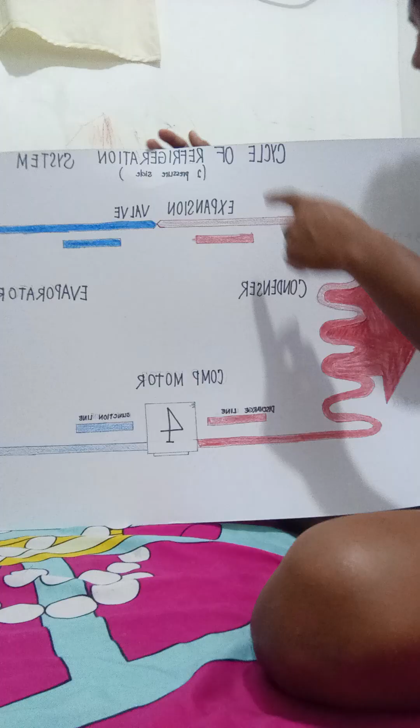Good day. Now I will discuss the cycle of refrigeration system. This refrigeration system has two pressure sides. Now we have four major components of the refrigeration system: comp motor or compressor, condenser, expansion valve, and evaporator.

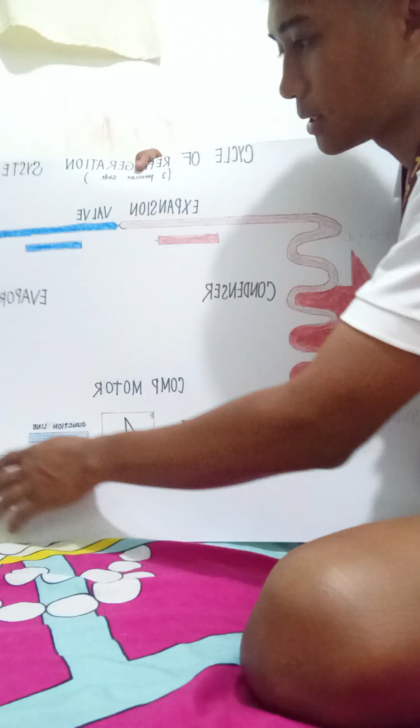First, the compressor. The cycle starts at the compressor. The compressor's job is to take low pressure refrigerant gas from the evaporator and compress it into high pressure. After the compressor, high temperature gas is compressed. This step is important because it gives the refrigerant the energy it needs to move heat out of the system, removing the heat out of the system.

After the compressor, we have the condenser. The refrigerant flows into the condenser, which is usually located at the back of the refrigerator or outside unit of the air conditioner. Here, the high pressure gas releases the heat it absorbed inside. As it passes the condenser, it loses heat to the surroundings. The refrigerant changes from hot gas into high pressure liquid.

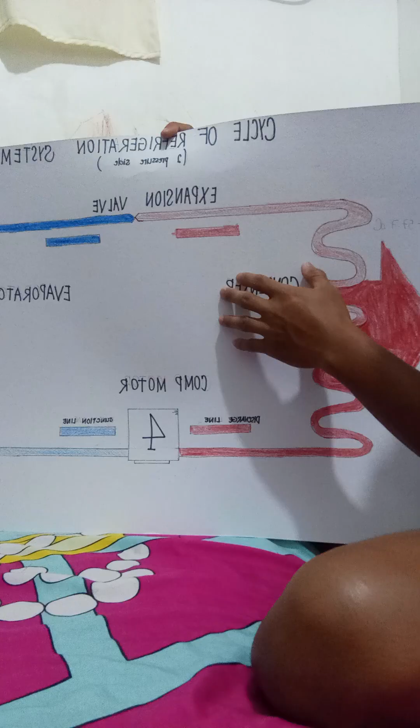After the condenser, we have the expansion valve or capillary tube. The refrigerant passes through it, and this component reduces the pressure. The condenser had high temperature gas, but the expansion valve reduces the temperature. As the pressure drops, the temperature also drops. This prepares the refrigerant to absorb heat once it enters the evaporator.

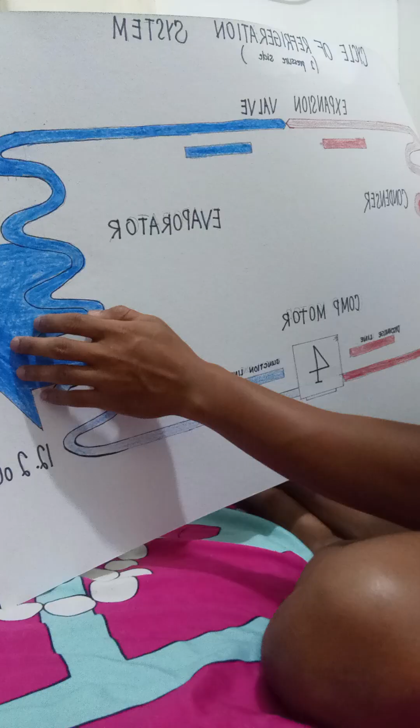After the expansion valve, we have the evaporator. Finally, the refrigerant enters the evaporator. This is the part inside the fridge or aircon where cooling happens.

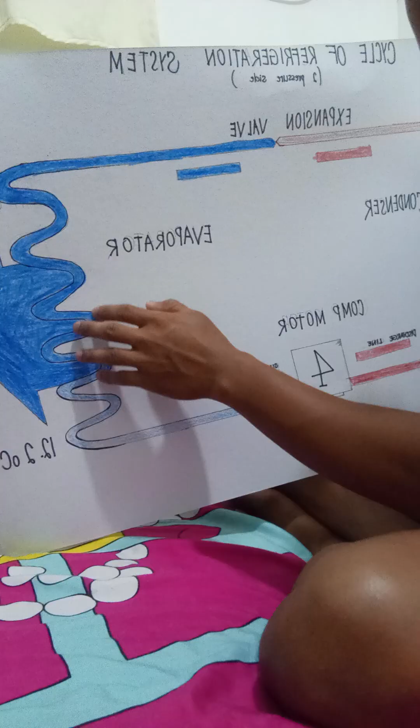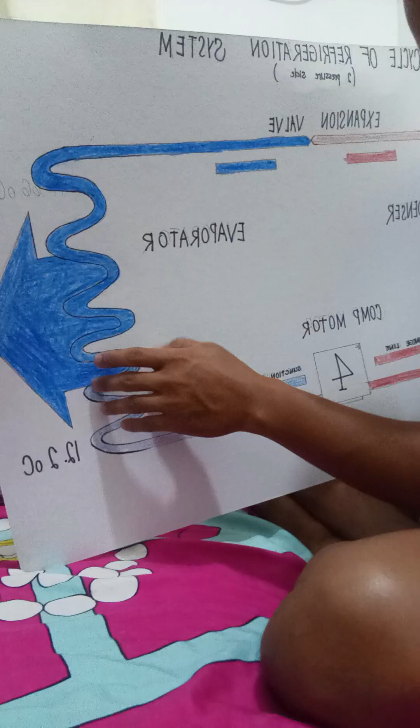The heat from the air inside the space, whether a room or car, is absorbed by the evaporator. It evaporates, turning back into a gas. The gas then returns to the compressor and the cycle repeats. The heat in your room or car is absorbed by the evaporator, and the cool air is returned to your room using a fan.

Now, after discussing the cycle of the refrigeration system, let's move to the parts of every major component.

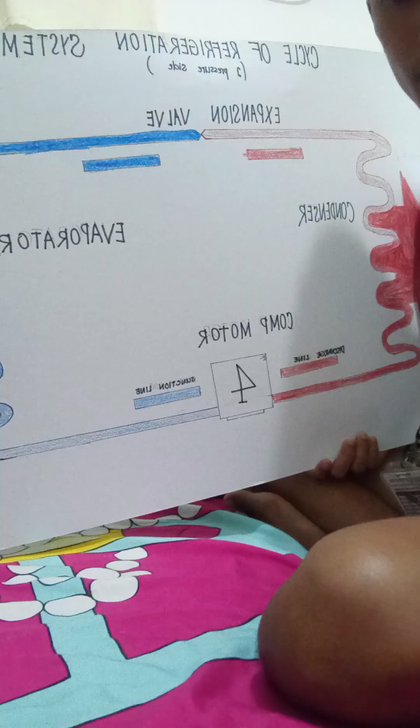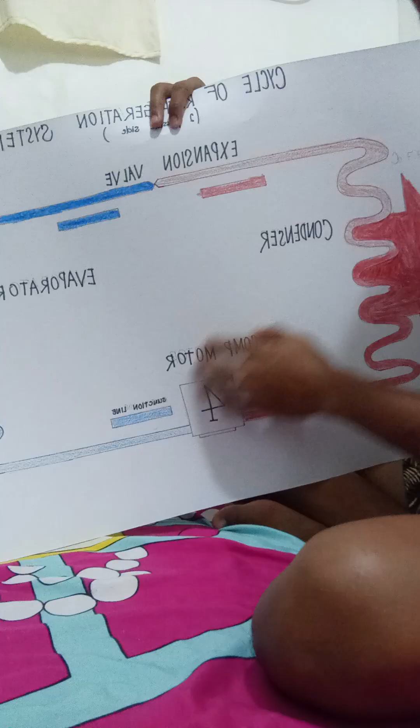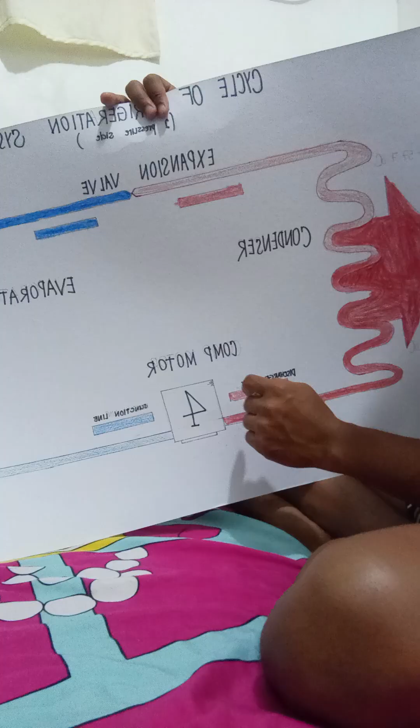Now the compressor has four parts. The first is the crankshaft, which drives the piston or scroll that compresses the gas, along with the cylinder and piston for a reciprocating compressor. The compressor also has valves, suction valve and discharge valve, which control the entry to the compressor. And the motor provides power to the compressor.

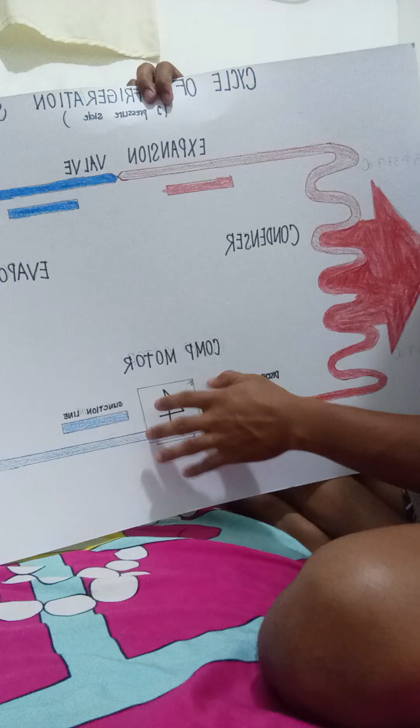Now let's move to how it works. The compressor draws in low pressure refrigerant vapor from the evaporator through the suction valve, compresses it inside the cylinder, then discharges it as high pressure, high temperature gas.

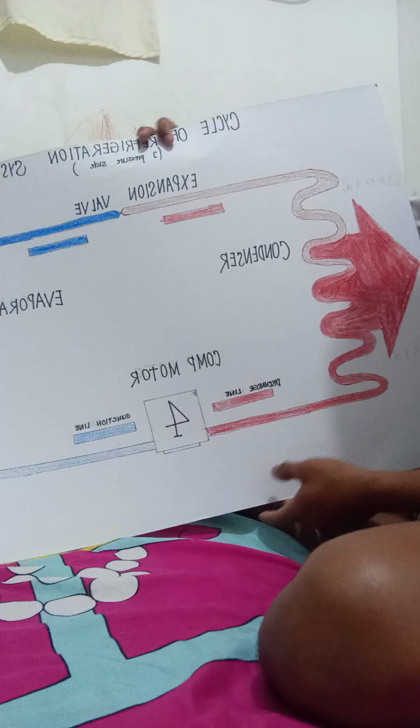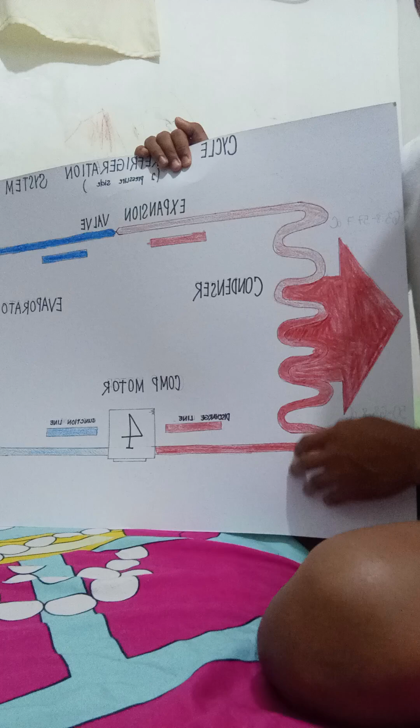Now let's move to the condenser. Condenser parts are first the coil, second the fins, fan, and receiver tank. The condenser coil is the tubing where the refrigerant passes. The fins increase the surface area. The receiver tank, sometimes combined, stores liquid refrigerant.

Now, how does the condenser work? The high pressure refrigerant flows into the condenser coil. The hot, high pressure refrigerant in the condenser coil, with the help of the fin and fan, releases heat to the outside air and condenses into a high pressure liquid.

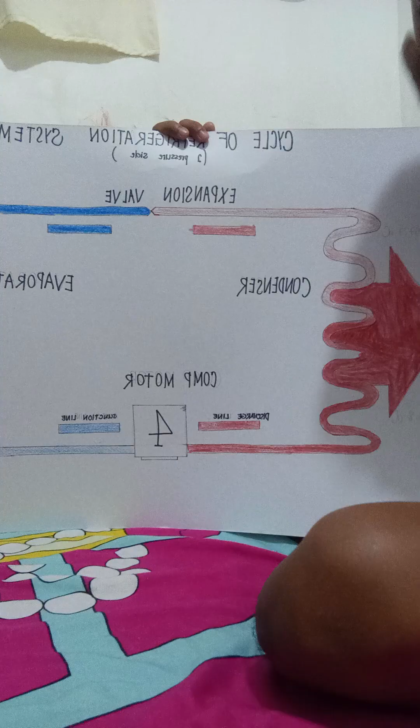After the condenser parts, let's move to the expansion valve, which has four parts: the valve body, the diaphragm, needle pin, and sensing bulb. The valve body houses the valve.

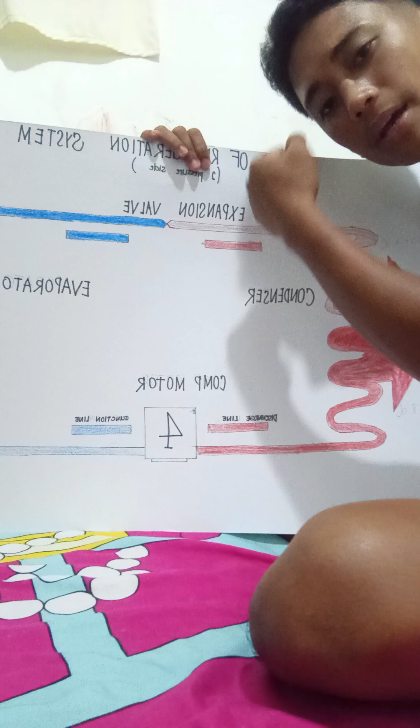The diaphragm moves up and down to regulate refrigerant flow through the expansion valve. The needle pin controls the size of the opening. The sensing bulb detects evaporator temperature to adjust the flow.

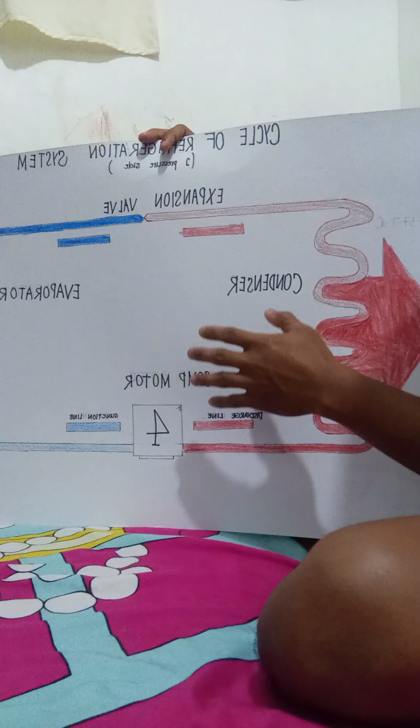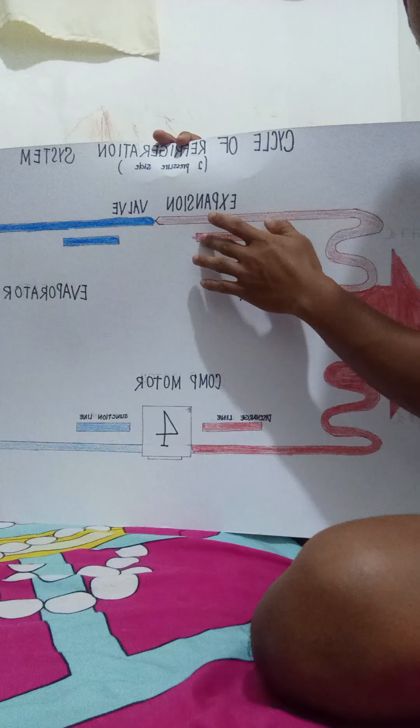Now, how it works: the expansion valve reduces the pressure of the refrigerant by controlling its flow. As the refrigerant passes through the small opening, its pressure drops suddenly, making it very cold before entering the evaporator.

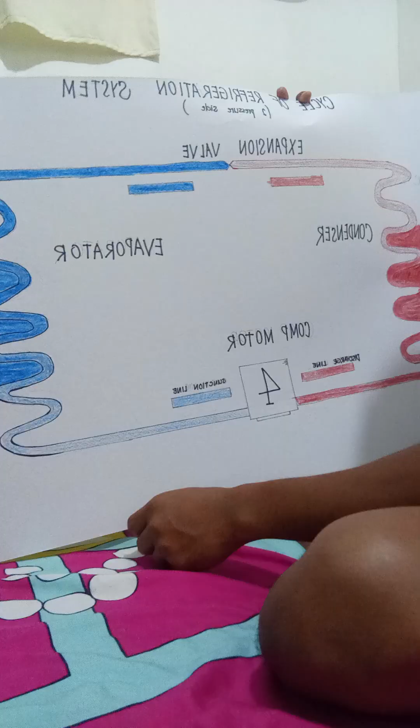Now let's move to the evaporator, the last component. It has four parts: the evaporator coil, fins, blower, and drain pan. Now the evaporator coil, how it works.

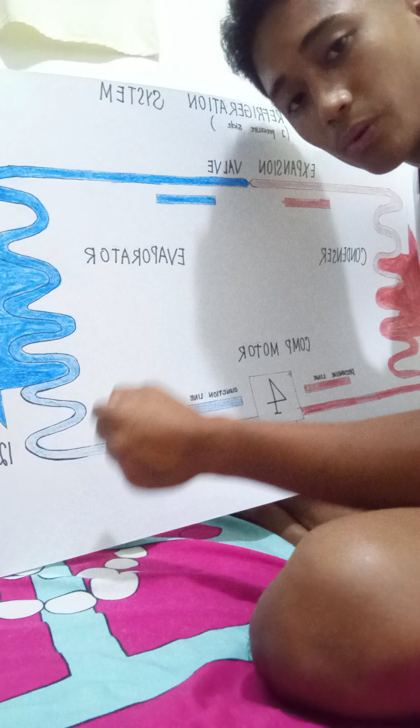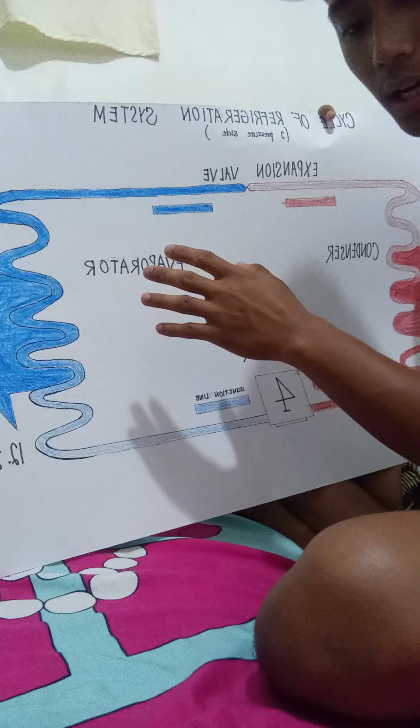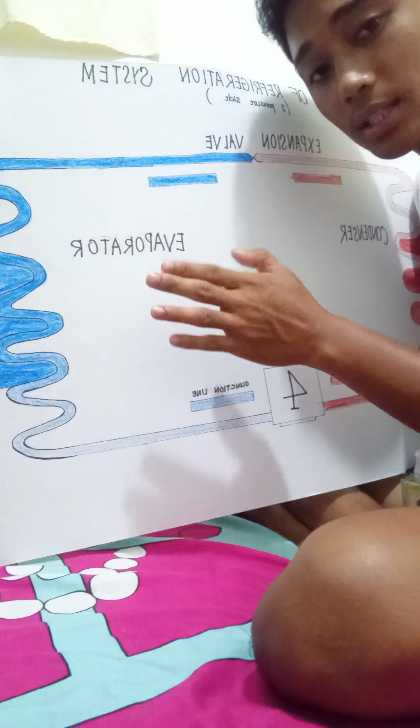The evaporator coil is where the refrigerant absorbs heat, and the fins work to help transfer heat from the air to the coil. The blower or fan: when the evaporator absorbs the heat in your room, the blower or fan releases the cold air back into your room.

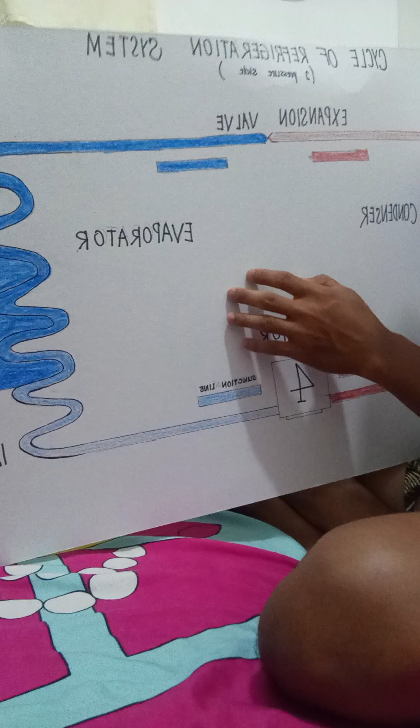Now the last part is the drain pan, which collects condensed water from the coil.

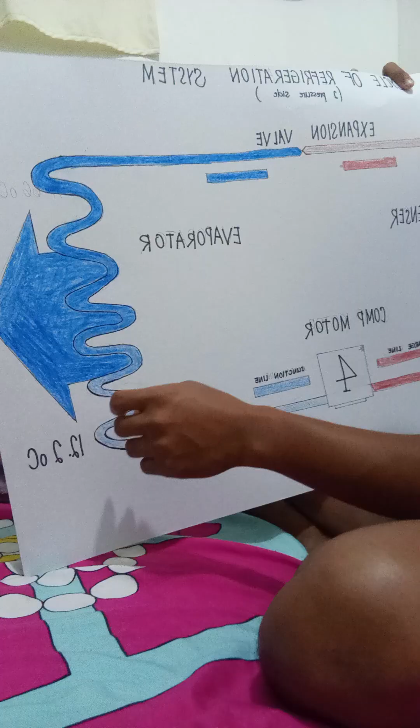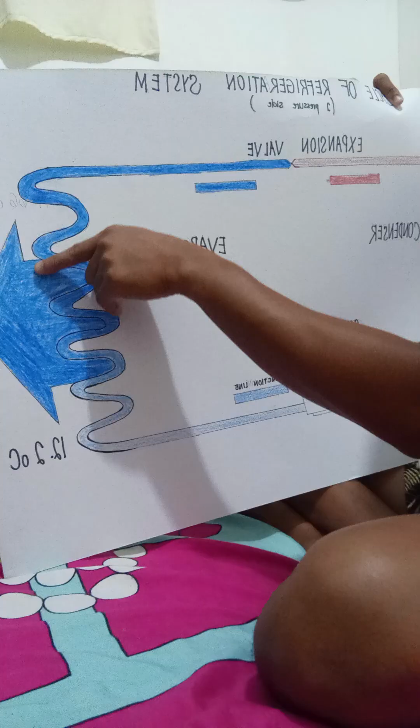Now, how the evaporator system works: the low pressure cold refrigerant enters the evaporator coils, and as warm air passes over the coil, the refrigerant absorbs the heat and evaporates into gas. The blower fan releases the air cooling into your room, and after that, the refrigerant gas returns to the compressor again.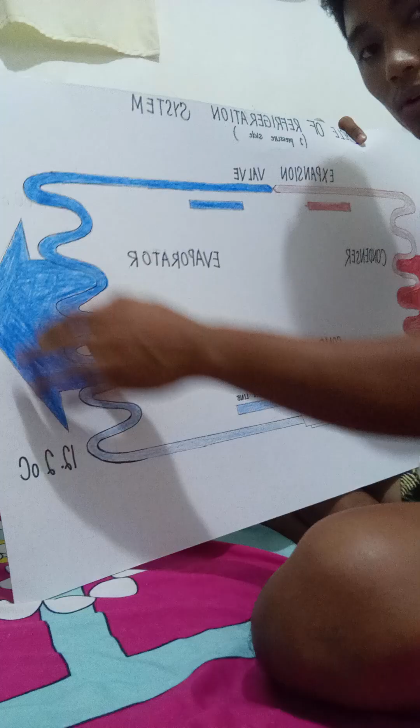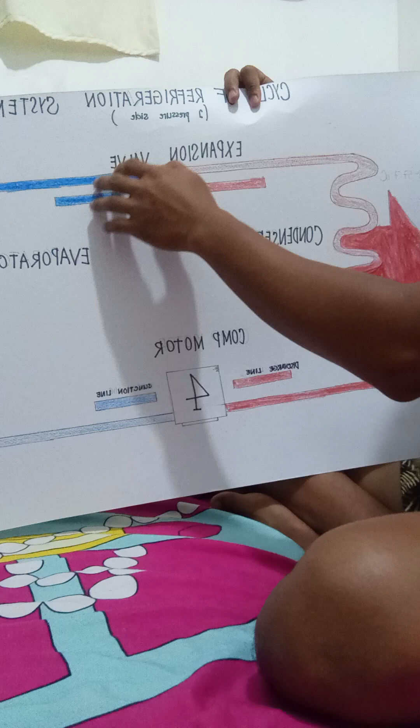And the cycle continues moving. Now, each main component of the refrigerant cycle is made up of smaller parts that help perform its role. That's all for my vlog on the refrigeration system. Thank you.